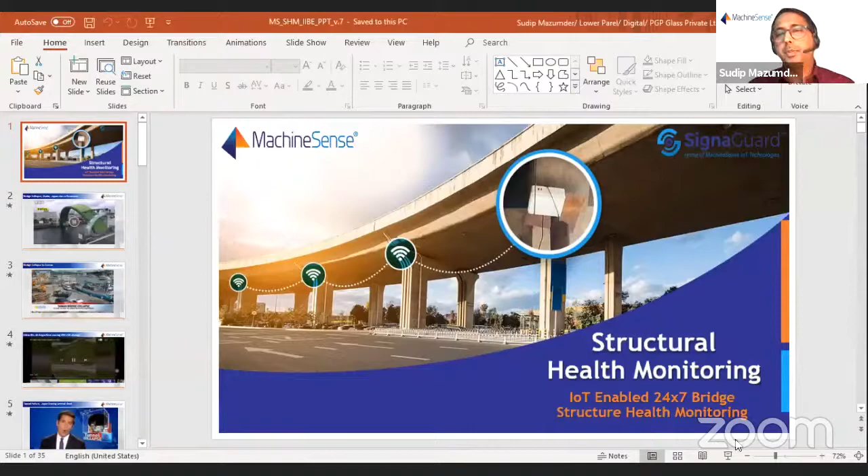Yeah, I'm there, sorry. Sorry about that glitch.

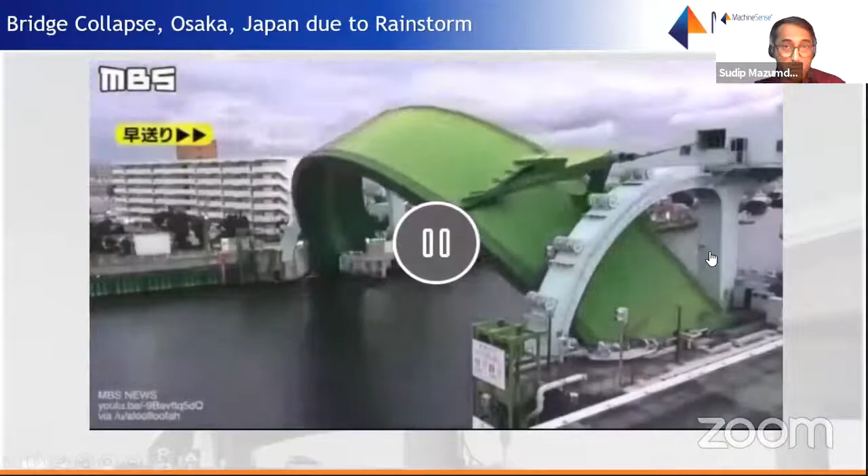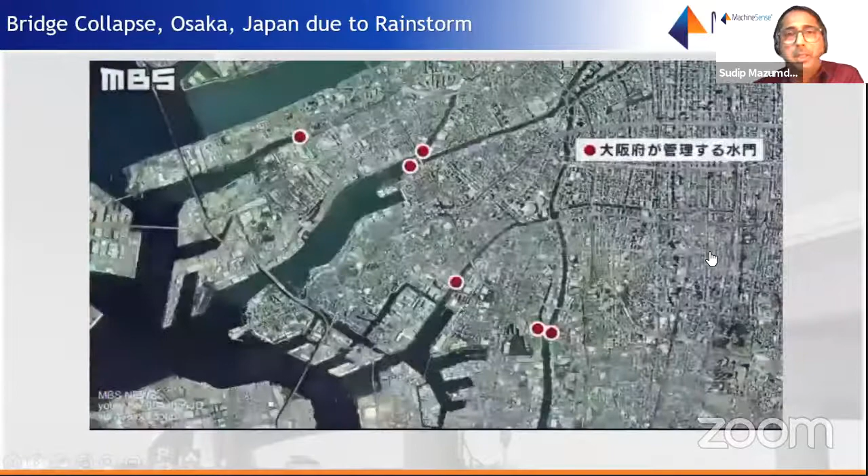Before I go into this presentation, I'd like to show some of the failures we have seen in the world, whether it's a bridge, a tunnel, or some other structure. Structural health monitoring is important, but structural failure is not something that happens only in India and not outside. This one is in Osaka, Japan - an arch bridge that failed because of a massive rainstorm. It's a question mark whether it was being monitored, but certainly it failed. Whether monitored or not, I'm not sure, but since it's Japan, we believe it possibly was being monitored. If I go to the next one, it's a Taiwan failure.

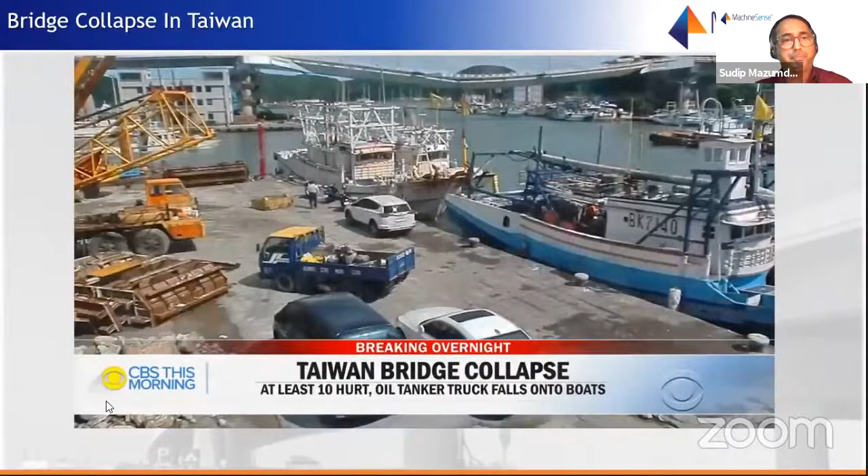A 460-foot-long arch bridge crashed down in a coastal fishing village. It caused an oil tanker truck to fall and burst into flames. Boats in the water below were crushed. Six people are believed to be trapped on one of the vessels. An Air Force helicopter, as well as more than 60 military personnel, are searching for possible victims. Ten people were taken to hospitals, six with serious injuries. The collapse happened hours after a typhoon swept by the island.

Important here is they're talking about the weather and not about the monitoring side of it. I'm sure the weather is one of the catalysts, but the bridge possibly was weakened for some other reasons as well - a 460-foot long bridge. Let me go to some other structures as well.

We believe SHM as a subject is pertinent to all kinds of structures. This is a failure in Edenville, Michigan last year, just before COVID, when $2 billion damaged the downstream. It's an earthen dam. There it goes... there it goes... this gives me goosebumps actually when I look at it. There we go, there's the rush.

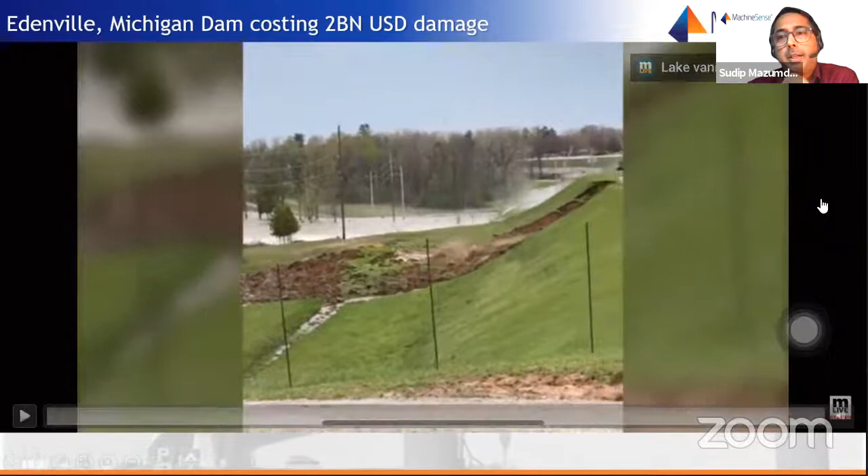And interestingly, this earthen dam failed in February 2020, and it was cleared as fit in December 2018, just 13 or 14 months ago, by the respective authorities. What this means is, I personally feel that within 12 months this doesn't happen - it must have started long ago, possibly with water seepage from the upstream to the downstream, which we could not see visually. We could have done it different ways, but we could not see it. Today, understanding the seepage inside compacted soil, from one corner to another, is so easy to do through sensors. But I believe there was nothing - it's all visual, and this is US in 2020 I'm talking about.

Let me go to the next slide. This is a tunnel failure in Japan. So I'm talking about the US, Taiwan, Japan - these are all developed countries, so obviously I don't have that much of a picture here. But this is important to set the tone for why we need this. Overseas tonight in Japan, outside Tokyo, cars and trucks were passing through a 3-mile-long traffic tunnel when the ceiling began to cave in, triggering a fire, trapping drivers inside.

Tonight, they're still searching through the wreckage, and ABC's Akiko Fujita is in Tokyo tonight. Grainy surveillance video inside the tunnel shows the frantic efforts to save those trapped.

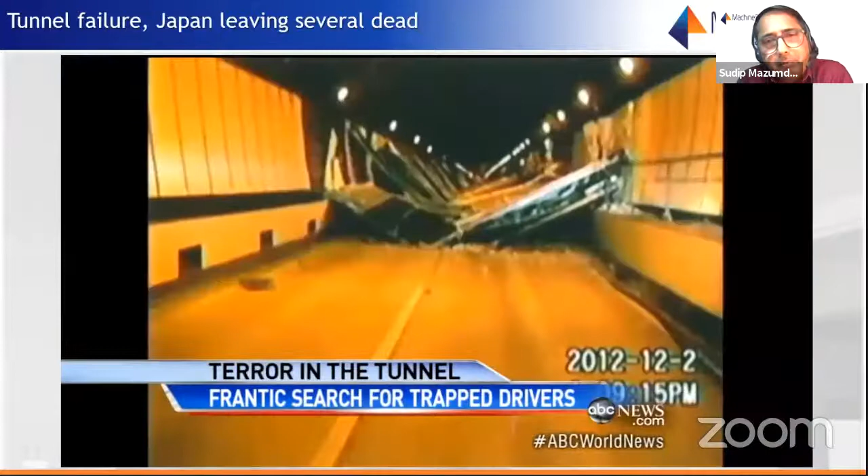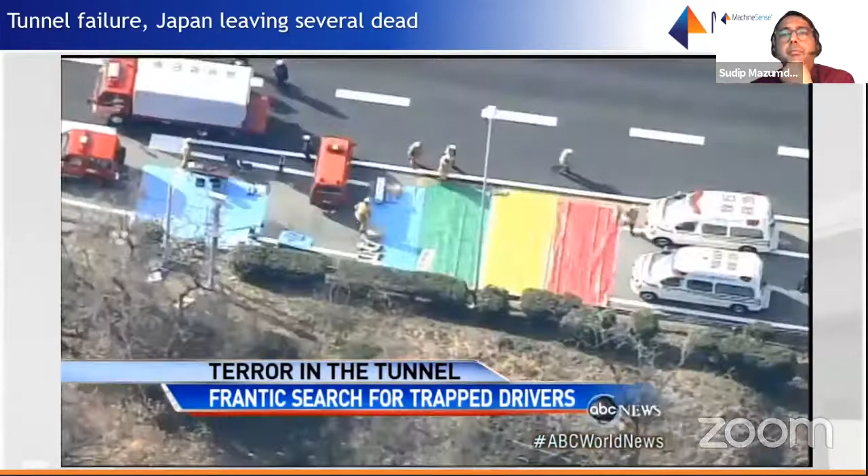Japanese police say these large concrete ceiling panels, as many as 150, came crashing down, sparking a fire on this major highway connecting Tokyo to central Japan. Witnesses describe a scene of chaos as people ran to safety. Flames and smoke billowing through the 3-mile-long tunnel.

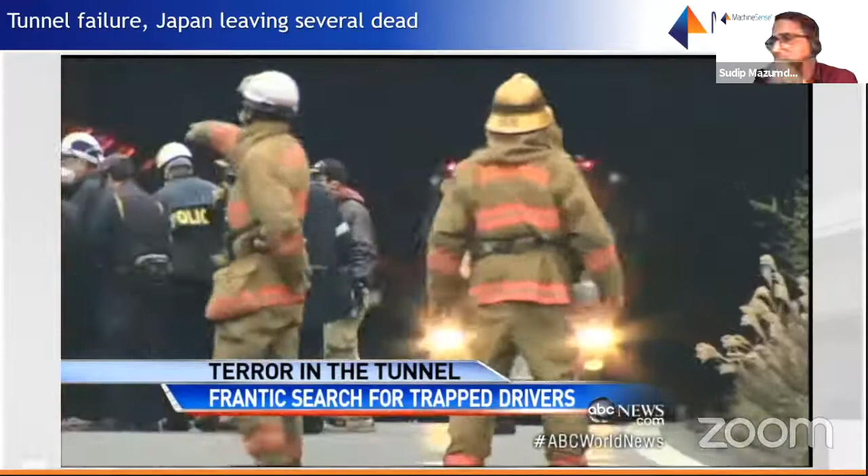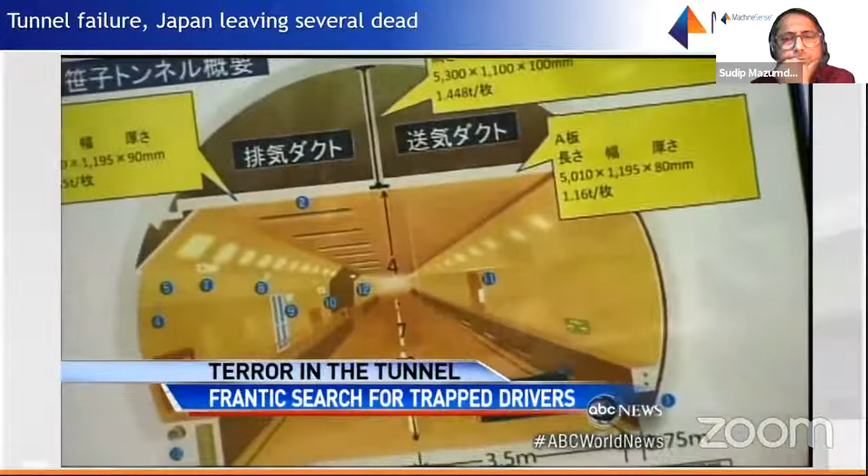One truck driver, trapped under the rubble, called for help, but there was so much smoke, firefighters had to halt rescue efforts, fearing another collapse. Late Sunday, rescue crews pulled the charred remains of several bodies, including the truck driver. Investigators are looking into what caused the panels to collapse, but say the tunnel had just passed a routine inspection in September. Akiko Fujita, ABC News, Tokyo.

Overseas tonight. So that's the tone, actually. I just wanted to set it, because it's important that we recognize today that it's a matter of public safety, that we should go for some kind of maintenance. I know that it happens, and that's exactly what we're going to talk about. But we'd like to also talk a little bit about old versus new ways of doing things, and that's where lies possibly our digital experience and your experience as brilliant civil engineering people, and how do we mash up ourselves and save for the future and give a safer world going forward.

Right. If I look at the bridge stats in India, I must say that Atul Bove told me some of the statistics. 170,000 bridges, 21,000 bridges are so-called deficient. Possibly, either way you can tag it, but it basically needs some kind of intervention. And 3,500 bridges are possibly more than deficient. Now you call it unsafe, you call it something else.

It's a separate thing. And also we looked into it, the US has probably more than 90,000 bridges. Denmark has 9,000 bridges. Sweden has 22,000 bridges. They need attention because those countries, post World War II, there are lots of bridges which actually started with 100 year lifespans, but because of weathering and because of the explosion of automotives, that has reduced the lives of those bridges, and they need to be monitored at this point in time.

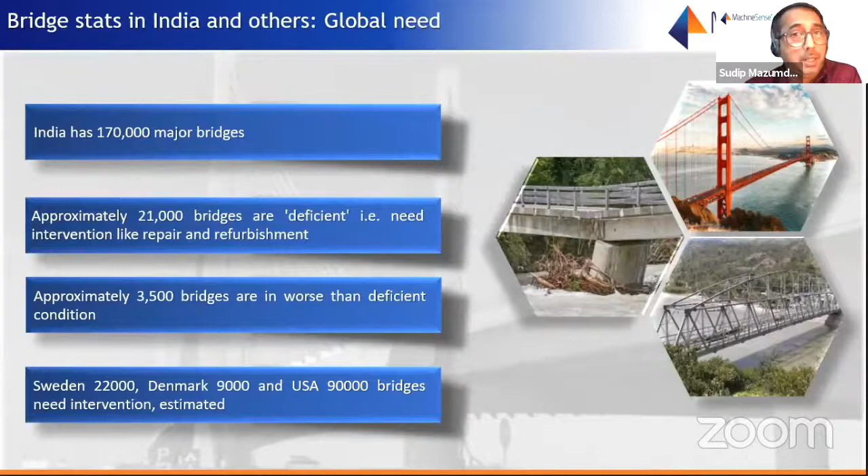And that's why SHM is a global need. At this point in time, if somebody tells me or tells you that they know it all, I think we need to look at what they know, but it's not to doubt anybody, because it's a field that is emerging. Right now, what is it that we used to do? In fact, I was talking to some of you in the audience over the last 15-20 days, and Bongirwaji is a great teacher of mine in that way, and I've got a few more in this process.

Important is, what we do is basically all physical today, right? We send, you can see the picture also. I know that one of the companies does it day in and day out. They basically have got a gantry and they send it and try to do it. But at the end of it, those two gentlemen who are doing it at the bottom of the truss, you can see, right? It's all visual.

They want to see the visual, the cracks, the rusting, the subsidence, the breakages, the corrosions, all, whether it's steel or concrete. They look at it physically. Probably they take some photographs, and later, I don't know whether they do image analytics, which is basically part of AI, artificial intelligence at this point in time. And I believe, I haven't seen it, to be honest. And if somebody does it, fantastic.

Again, important thing is that the current way of doing things is a lot of testing is done during the construction, and that becomes the baseline, and you start from there. I've seen very few cube test failures in my own life, whatever I've seen in the last 7-8 years. Most of the data that you have today, the static data, sometimes quarterly, sometimes once in 6 months, sometimes monthly, discrete data. You don't have the continuous data. Most of the places it's not in one place I'm talking about. And you put it in Excel and try to take a graph and show it as.

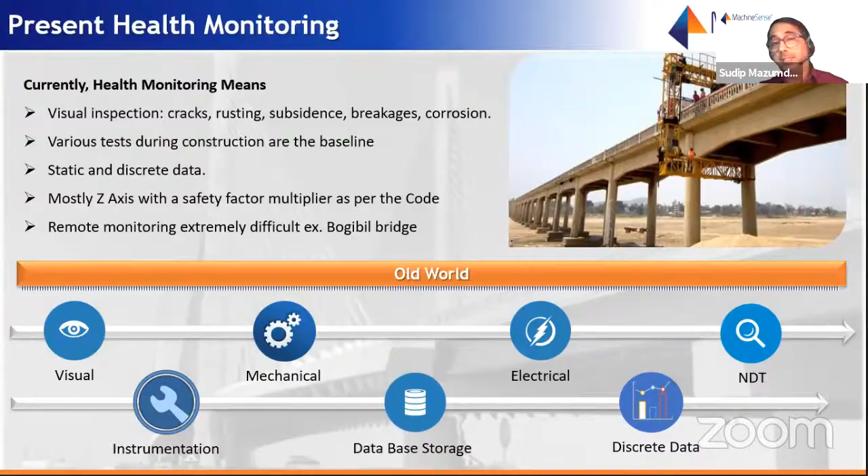So the important thing is that present health monitoring is visual, mechanical, with a little bit of electrical entity, and discrete data. Now, with the advent of new technologies, here comes Dr. Biplav, who will talk about what has happened in sensor technologies, given his worldwide experience. Biplav, can I bring you in on why this is relevant today? Your experience and research are so important for the civil engineering field, given the development in these sensor technologies.

Sudip, thank you, and thank you everyone for attending this seminar. As you know, I'm not a civil engineer, but I certainly find this area of structural engineering immensely interesting when I look at the progress that has happened in our semiconductor area. So let me give you a brief overview of what happened in the semiconductor industry in the last four decades.

Typically, every 1.8 years we have doubled the capacity to process data as well as to memorize data. We all know this because all of you have a smartphone, and you've seen that you don't like to keep your smartphone for more than 2 years, because a new model comes up with a lot more memory and speed. So we keep upgrading.

Now, what's the impact in the sensor area, especially data-driven areas? If you look at this curve, you immediately understand that right now, in the size of a coin, you can have an entire single board computer that is more capable than any desktop computer you were using back in 2005 or 2010. What this does is allow you to process a lot of sensor data. In fact, a lot of advanced algorithms—machine learning, advanced rule engines, high level regression—can run at the sensor edge. And this has an immense implication in the civil engineering area.

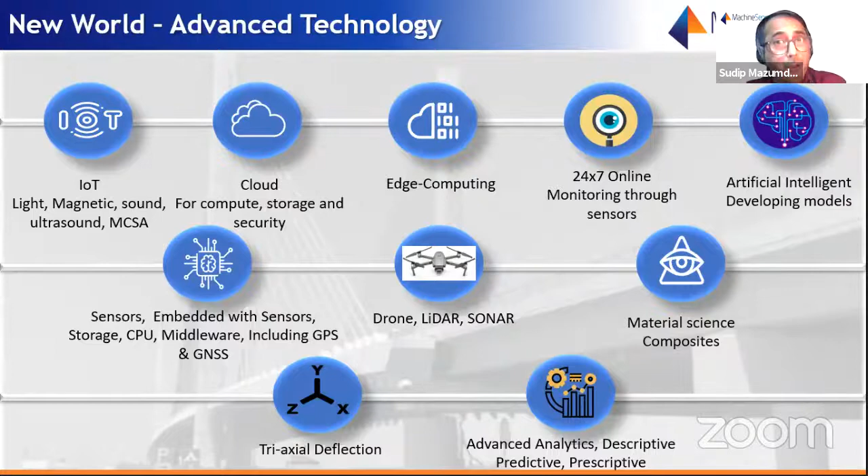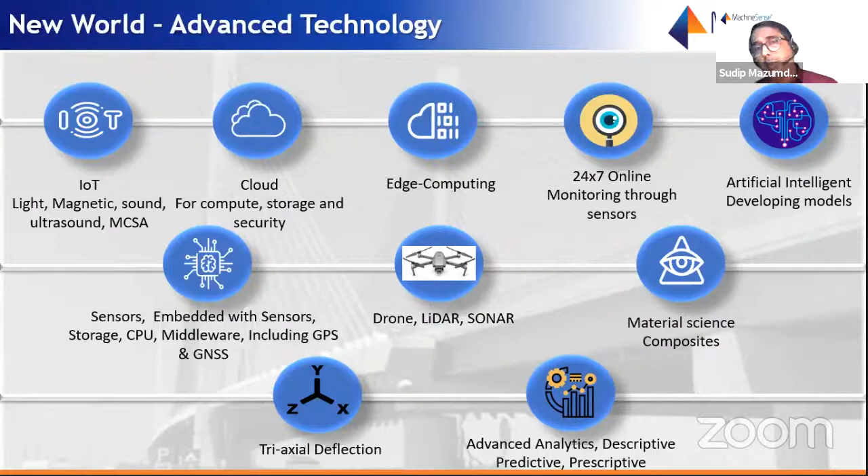So these are things, one of the specs I have seen recently, somebody is asking for a particular sensor, which is GNSS, global navigational satellite system, which actually works with the constellation, or even artificial satellites. Why do you need it? Do you really need it? And it's expensive. You need to know that there are people who have got some patents in there, and it may be quite expensive. So we can actually look at, because it's an engineering solution that we are doing, as much as the design you do, this is also a solution that we have to do, right? So there are some specs which are actually, in our view, even older. Even 2-year specs are also quite outdated. We can work together with you on what is good and what are not so good, or what is possibly outdated at this point, even if you got it 2 years ago.

Now, very quickly on this, why do you need to have structural health monitoring? In fact, we were just asking ourselves, for the last 2.5 years, when we came to the market, we were thinking, can we look at 24/7? That's a very important thing I talked about. And can we monitor all three axes, as people have talked about? Does the structure need major maintenance soon? How do you understand that from the data itself? Sensor is just one part of it.

So you can put a sensor, it's an ornament to us. The sensor will help you get the data. But then what? How will you understand? How do you assess? Does it really require monitoring or maintenance at one or two sections?

Similarly, if you look at daily and seasonal deflection and recovery time, have you ever measured it? Whether it's at night when there are loads of trucks going on, how the deflections behave with soil-laden trucks, the soil and aggregate-laden trucks that go over the bridge, how it happens, how it behaves, right?

Similarly, we'll have to look at the temperature variances as well. We know that in some places the temperature goes between 4 to 40 degrees, and how does the variation happen? In fact, we'd like to talk about it a little bit with the data.

Similarly, we are talking about, can we predict in future the residual life of a bridge or a structure, based on the continuous data, based on data for a substantially long period?

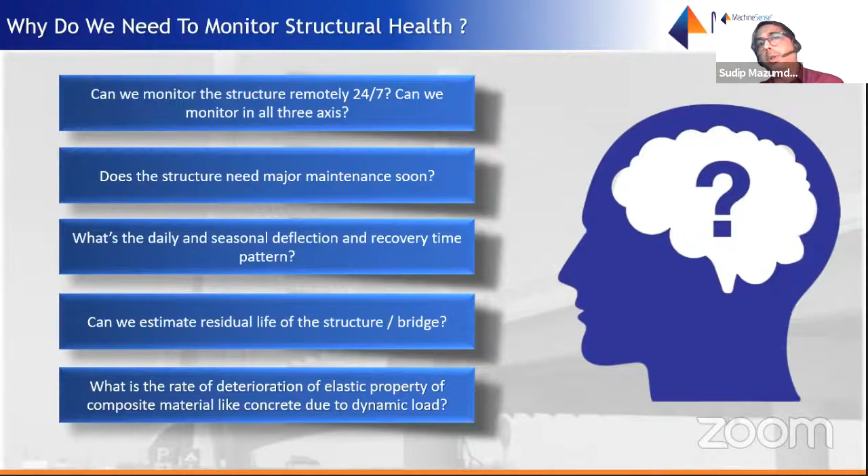So only then can we know what is the rate of deterioration. Now, deterioration is an elastic property - how the bridge is going into the plastic property zone. Steel and concrete could be different. It's more that we have asked this question on the concrete side.

Now we are asking these questions, but we believe that MachineSense as a company is actually in a position to think innovatively. Why? Because the company is a 2014-born company, only 5-6 years old.

And as Biplav himself is one of the co-founders of this company, we've got John, who is also another PhD, he's working on this. And the guy who founded this company is basically Conrad Bessemer, who I told you about last time also. He's the great-grandson of Henry Bessemer, who is the inventor of steel, right? So it's in the gene.

And we believe that we are the company that can actually challenge this part of the world, not only because of the heritage, but because of the gray matter that we have, and we are hiring.

Now let's go to the end-to-end solution part. What do we do actually? If you look at it, there are three basic blocks at the top. One is the basic building block to us. Second one is design and build the software, what actually processes. And the third one does the analysis, the actual causal analysis - what is the effect, what is the cause, and why it is happening. All the whys are to be based on the data on the right-hand side.

So the basic building block is basically sensors, different kinds of sensors. Of course, there's lots of patents, lots of big physics work happening at that end. Though it's very small, we've written that it's just getting sensor data, but sensors could be of various types, various technologies. After that, once you get that, we actually process it through the gateways - even the gateways could be extremely sophisticated.

And then once we get the data through the gateway, we put it in the cloud. And why do we put it in the cloud? Because we've got the storage space today, we've got massive computing power. People have talked about the algorithms, and interestingly those algorithms today can actually run on the chip as well - even on the sensors, because we get the space. Even a thumbnail-size computer can process terabytes of data today. So thanks to the technology.

And once you do that, there's some basic analysis you can do on the cloud or on the local server where the data is being kept. So what kind of analysis can you do - normally if you look at anyone, they'll be showing you some kind of time series data. We also show the time series data. Time series data is nothing but what's happening over a period of time.

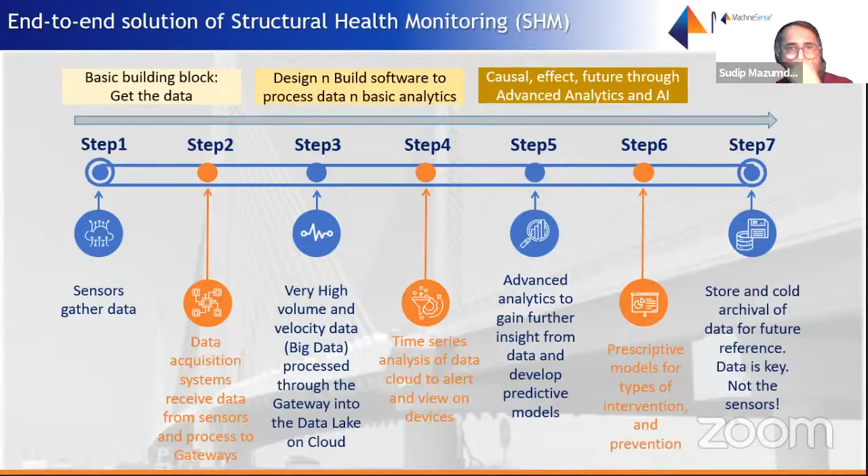But important is, whether it's the cable level sensor, the girder level sensor, or the bearing level sensor, we're also talking about the scouring sensor. I've been given a challenge to look into whether we can get some sensor to measure the scouring post-flood situation. Definitely will be looking into that if something exists in some part of the world. We don't have it, but we have the necessary wherewithal to approach many others.

Another important thing is, if laden trucks or trailers are going, the validation engine works basically through CCTV cams, etc. What you used to do earlier with manual and visual checks can be done today through drones. All this data can go into our cloud, and from the cloud we can do the analysis and show it on the mobile as well as on your computer.

It's as easy as that, but again there are two parts of it, as I said. One is the time series analysis, which also has a lot of sophistication, but an even more sophisticated way is, how do we get the causal analysis?

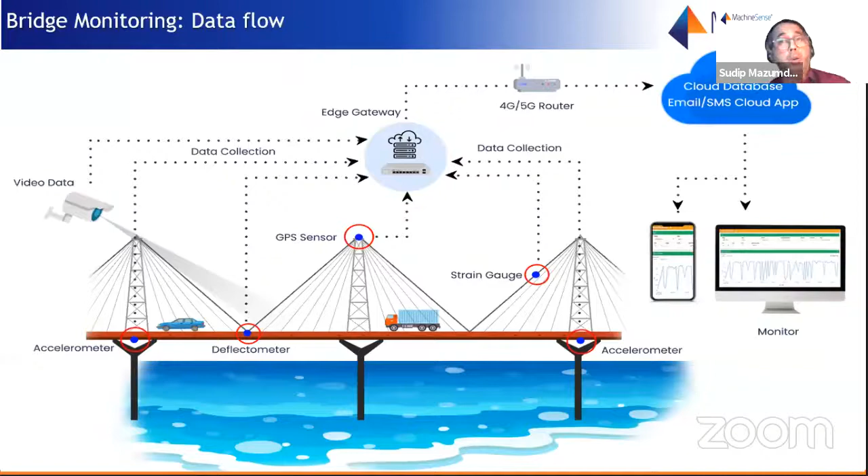So if you look at what you monitor in the bridge system: deflection, acceleration, strain, temperature, load, inclination, scouring - these are samples only. Lots of other things can be done, and different structures have different types of data to be gathered. It doesn't mean one size fits all, because for every type of data we have to look at what kind of sensors we need, how modern they are, how expensive they are, and we also have to look at cost effectiveness.

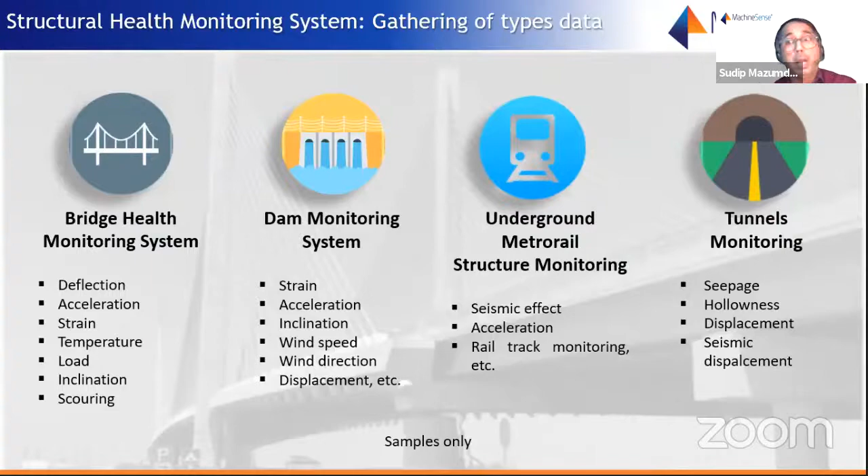We also have tunnels or bridges in the Himalayan region where we need to monitor seismic vibrations and gather that data. Not only gather the data, but also effectively nullify the vibration through mathematical algorithms - to determine which part of the vibration is due to earth movement, and which part is due to vibrational deflection from the loading pattern of vehicles, or other elements like winds.

Now if I look at a holistic system, that's what we are talking about. A holistic system basically involves different types of data - whether it's accelerometer data, vibration and deflection data, or drone pictures, CCTVs, or any other normal pictures as well.

Similarly, maintenance records - we believe that past maintenance records also have a bearing on structural health monitoring, because if you've been doing minor or major maintenance over the last 5 years on a bridge, that definitely has a bearing on the health. That's why we believe that record also needs to be part of the analysis.

And various kinds of analysis - I'm not going into too much detail of that today. The geotech data, in fact, should also be part of it at some point. I'd love to look at that side too, from the subsidence point of view of the bridge.

Similarly, testing labs - if we get the test data during construction of these structures, and secure that test data, it can be very useful after some time, because we don't have it currently. Having been part of some large construction companies, what typically happens during construction is: fill it, shut it, forget it. How do we get that filled data not to be shut away and forgotten, but made available for the future? That's what we need to do.

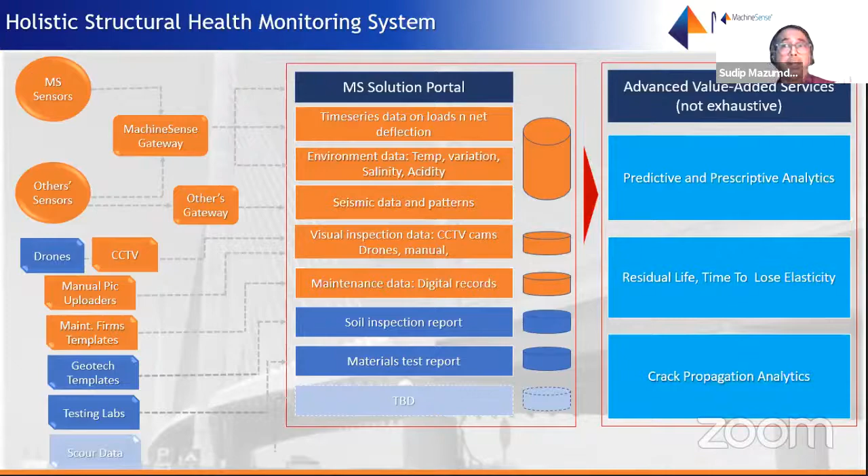But important is, let's make a start. If you have done it, we can actually look at that, and it will be enriching the field itself. And that's why we believe we can contribute to this world.

Biplav, can you just take this slide, please?

Yes, thank you, Sudip. Let me give you an overview of the initial sets of sensing mechanisms of the sensors we have in MachineSense. I already briefed you about the 3-axis deflectometer. This is a wonderful innovation of edge sensor technology, because we run a lot of computation on the sensor edge. Using that, we will be able to detect a deflection as small as 10 micron resolution.

Then we have ambient temperature, air temperature, and humidity sensors, out of which surface temperature is important because it gives you the surface temperature of the steel structure, which is very important because you'd like to know the temperature of the surface of the object.

LVDT, as you always know, is a good sensor to measure whether there is any gap or any kind of fracture that is coming up. You can monitor all kinds of fracture.

Then 3-axis deflection, 3-axis tilt and strain sensor is a traditional tilt and strain sensor where you will be able to figure out the 3-axis tilt. The only innovation we've done compared to others is we might use the same transducer, but we also do a lot of edge processing, meaning we can correlate the root cause of that tilt by connecting it with a vibration sensor or a load sensor. So that comes to the next one, the 3-axis accelerometer and vibration sensor.

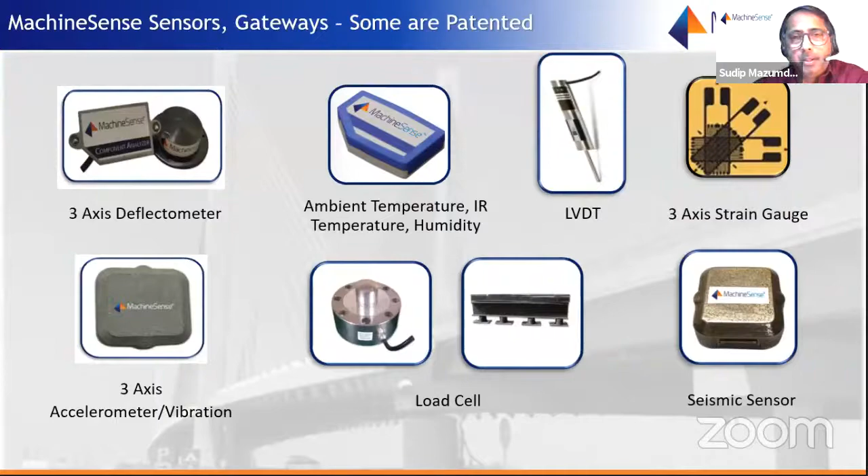This is one of the things I know Biplav loves, though he's not a civil engineer, but we talked about it, is the XYZ, the triaxial, why the triaxial stress. Yeah, this is a good one. I just want to take one more minute to tell you exactly.

One of the biggest challenges, not only in the code but to most structural engineers - I'm not a structural engineer, but I'm collaborating with many at this point - is that at any point in time you have curvature in any of the bridges, and that shear force will go tangentially and somewhat outward because of the centrifugal force from a moving truck. That is very difficult to monitor without having a 3-axis measurement, either in the strain or deflection. Prior to our innovation, there was nothing that could have measured 3-axis deflection. Now we are measuring this in our Ultadanga bridge, and we can measure the 3-axis deflection pretty regularly.

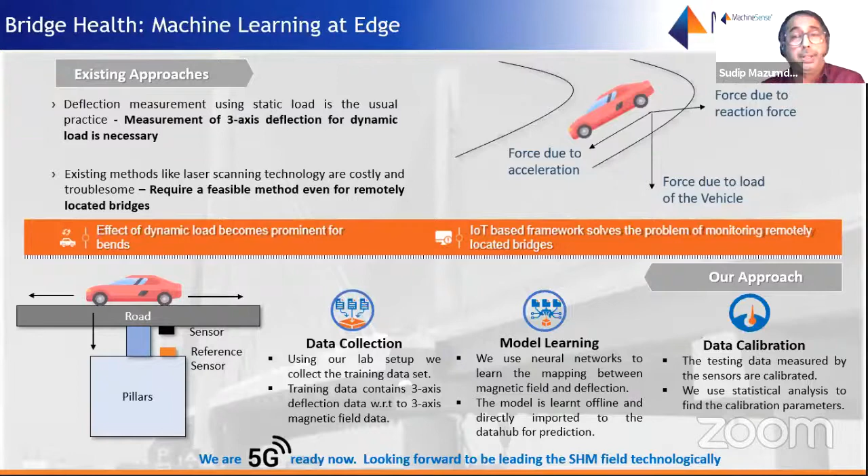I would just clarify one point - I know some technology companies also claim to do 3-axis deflection, but they use laser technology, and the Z-axis deflection they measure, and the X and Y they measure, are actually less reliable than the Z-axis, and that's the technology they use. I'm not saying some technology is bad or good - technologies are changing. Even our technology, probably after 3 years, we'll have to innovate on top of it. I'm just saying this for the sake of the audience.

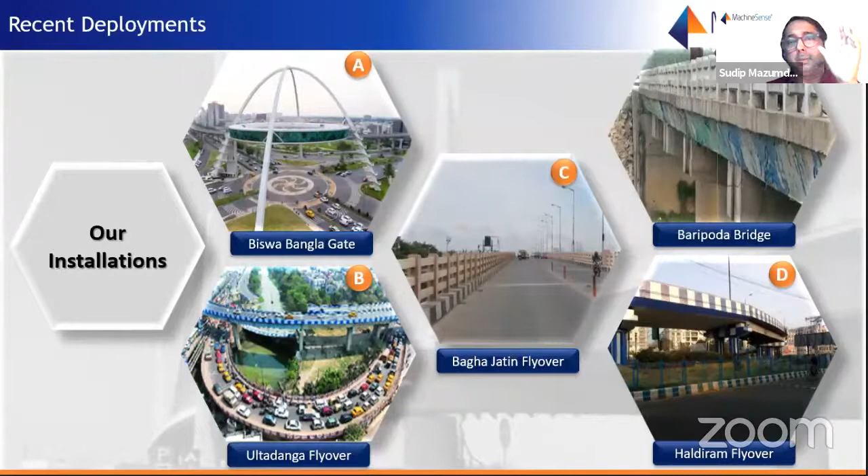Now next, we have some deployment info. Just to let you know, MachineSense, being a US company, has offices in Baltimore as well as Kansas City, and in Kolkata we have around 50 to 60 people, including some brilliant PhDs working with us - some of that work I'll show you. And the data gathered from various bridges, what we're trying to do is not just about putting the sensors - that's one of the jobs we do, and we do have partners as well - but what's important is once you get the data, what do you do with it?

What we do as mathematicians, digital practitioners, is when we look at this kind of large dip, meaning large deflections, we try to correlate it with what kind of vehicle it is, what kind of loading it possibly has. We get a picture, but to validate that, this CCTV camera is working for us.

And what people have just talked about, tomorrow is not so far. We are in the process of looking at deflection and trying to predict what vehicle it is, or what the load of that vehicle is. We can even go to that extent - whether it's multi-axial or single axial. We haven't gone there yet, but we are very close to doing that.

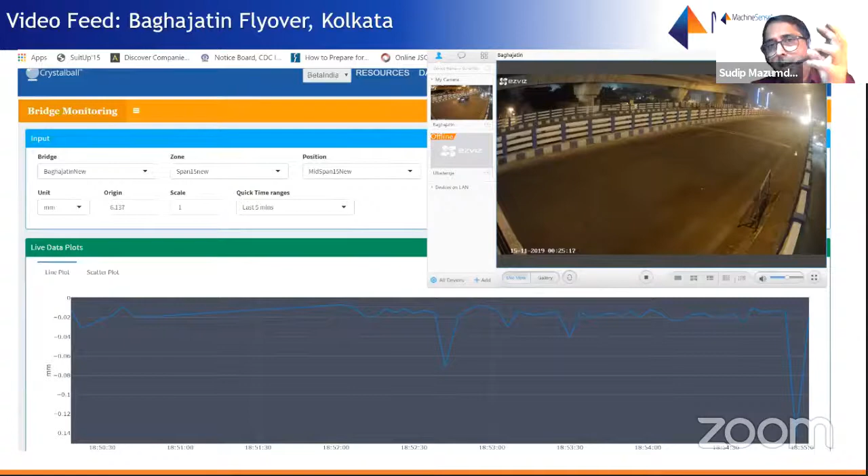So that talks about a possible insight into a material like concrete, which is a composite - it's a composite material. It looks homogeneous, but it's actually heterogeneous. So how does it behave? Today, that kind of behavior you cannot assess in any way other than visual. So we are saying let's take a data-driven approach and understand how the behaviors are.

So basically, I wanted to tell you this is from an original bridge. I've taken this a little earlier view because to show the data, we need some kind of permission. We took permission some time ago, so we are showing it. But it's important again to show this.

This is also a laden truck, you can see that. This typically happens in the night. And this bridge actually got weakened because of the movement of such heavily laden trucks at night. And we actually recommended not to allow them through a portal.

Secondly, when this goes down, as I told you in the last meeting as well, if you look at this bridge, it's actually in a little better condition. And this is the Z axis only - we do have X, Y, Z, all three axes. Now, this movement has come back almost immediately.

And it's a new bridge. Actually, there's an old one - you can see the other bridge in the other direction. If this happens, the truck happens and it will be coming here. So the recovery is worse in that bridge compared to this one.

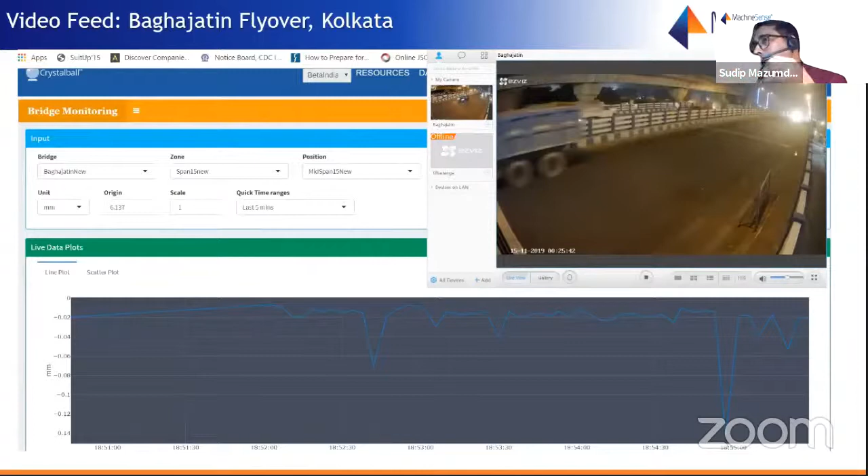This is where actually we'd like to go to. I'm just going to speed up a bit in the interest of time.

So what do we do in the MachineSense type? We have the sensors and a scalable software platform which can take terabytes of data from multiple bridges across the globe. We provide insights for data-driven decision making. Next, I'll show you some of the interesting curves we do, and we'd love to do this for you if you call us.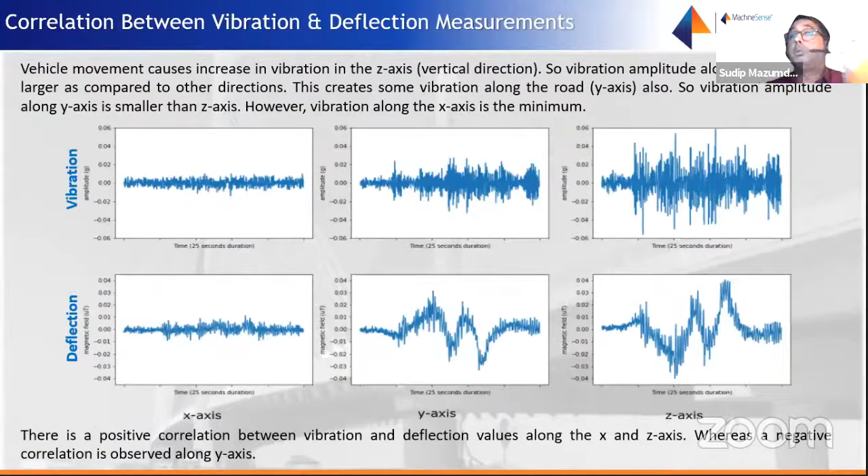So that's one part of it. Second, what do we do with it? We look at the data and do noise reduction. You may see lots of noise, meaning lots of deflection, but some of that deflection is caused by other elements - it could be seismic, or because of weather temperature. It has an effect on the sensor because sensors have a lot of metallic parts, and that creates noise too. So what we do is cancel the noise using algorithms, from raw data to processed data, and finally we get the result.

So if you look at the last one, this is the actual deflections data we got over a certain amount of time. This shows another important thing - not only the amount of deflection, but also the frequency of those high deflections, which actually weakens the property of the material. That's what we're talking about.

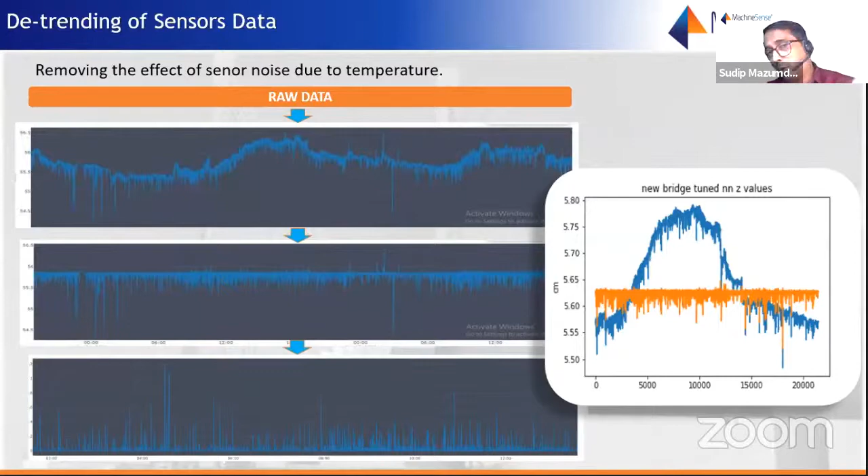Now, this is also done for seismic data. Unfortunately, in Calcutta, there is no seismic sensor at this point in time, as far as I know.

Next is weather temperature. We know that when the temperature increases, the deflection is affected. How do you measure it? Possibly with NDT, putting some gunny bags, etc. We give you 24/7 monitoring. This is what exactly happens - if you look at February and March, you see how the deflection happens. The X-axis is the deflection, with two curves: one for colder time, one for hotter time. See the deflection in the hotter time with a similar type of load - we've analyzed similar load density - and look, it creates 7 times more deflection. So it will be easier to understand and predict failures because of the weather effect. This is what we've done for temperature.

We're also looking at wind - you saw that Taiwanese bridge collapsed because of wind, they say. So we need to understand which other sections are getting weakened, how it's weakened, and why. It's not just about what you've seen in the Kolkata bridge that we showed - it's about why it's happening and how it's happening.

Again, then we looked into the curve. If you look at this interesting one, for the same stress, we tried to analyze the same data, and the same stress is causing much more strain on the bridge.

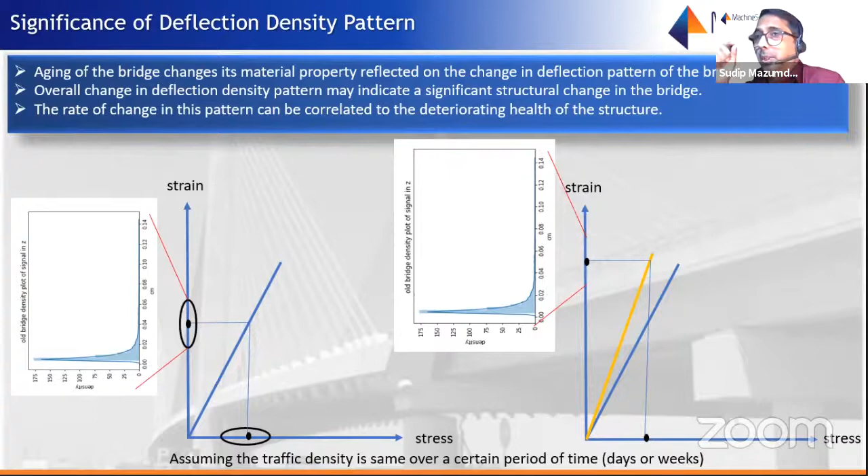And this strain under the same load condition, if we try to project how it looks, we'll show it to you. So we looked into the data, put it in a scatter diagram, and tried to see how these variations appear at different points in time. Clearly, on the right hand side, when we put in the normalized data, we can see there's a pattern in the bridge we are monitoring in Calcutta.

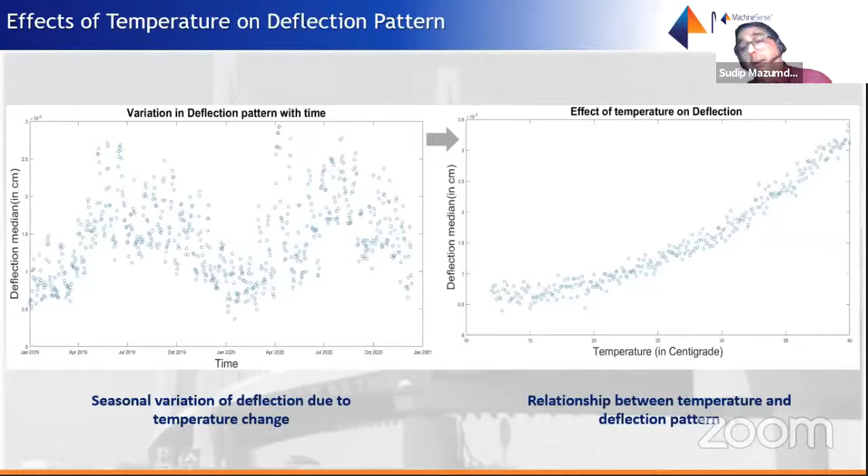This curve may be different for different bridges, and that's why we say it's a signature of a structure, different for each bridge. Even though both use M40 or M25 concrete, it will differ because the weather conditions are different, the load patterns are different, the absolute load is different, and the dynamics of the loads are different. As I said, a 20-ton truck at 60 km speed versus a 20-ton truck at 40 km speed will have very different nature of y-axis and z-axis deflection.

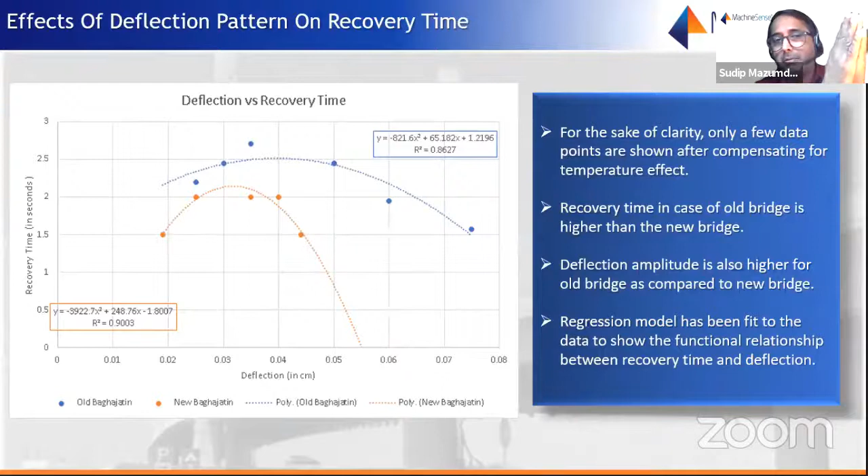So I'm just trying to show you a comparison over a period of time. The blue line shows how the deflection happens when it gets weakened, and the orange line shows that under the same load, it shows much lesser deflection. But we believe our analysis in the next curve will show how it is progressing. This is what we are trying to do at this point in time with the data.

That means we will be able to tell you what is the timeline for this - is it 5 years, 10 years, 20 years - depending on what data we are gathering. So I would really request you all to look at data gathering as important, but also to get insights into what's actually happening within the structure.

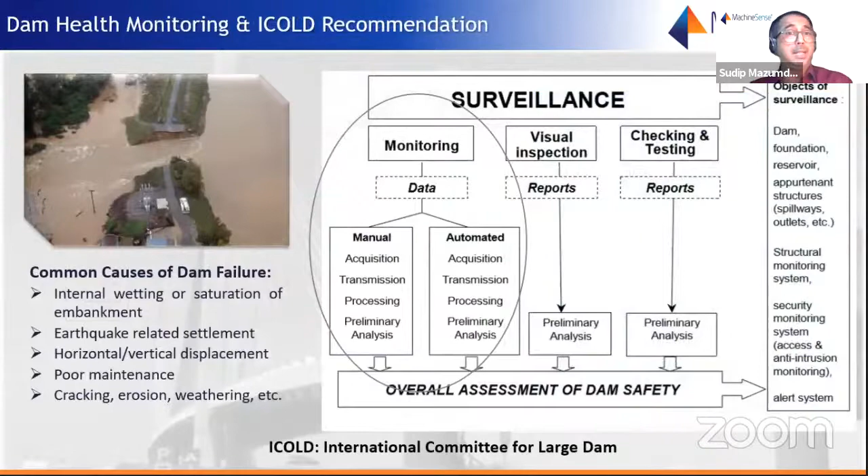So this is for the bridge we got, and we are trying to work with other companies as well - I'll come back to that. Similarly, it can be done on a dam. The DRIP program is there in India and globally. It can be done, and probably a dam will have much more than this because it is upstream - we'll have to look at the scour, the silting, and other things. Those things will also come in, along with displacement, similarly for the tunnel.

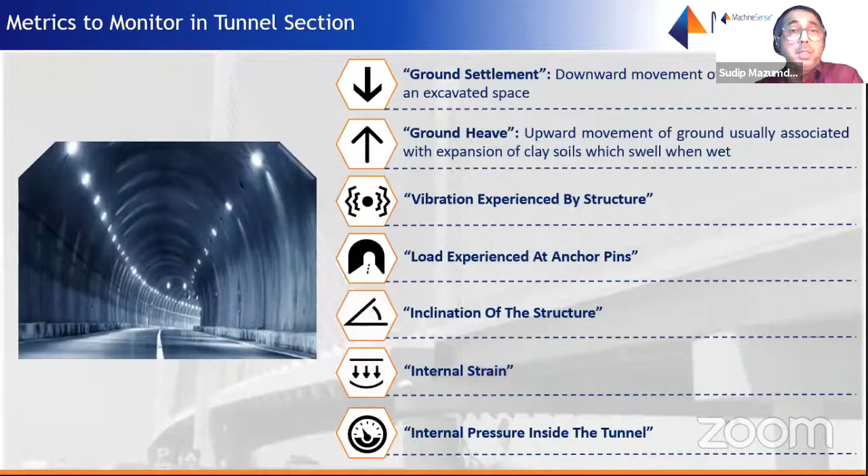In fact, interestingly, I have taken up the co-chair for underground construction, digitalization of tunnels and underground construction - this will be my subject very soon. Very specific subject - what do we do for a tunnel? Various things we can do, and we need to do it because we have very strategic tunnels like Zojila tunnel that need to be monitored. Otherwise you saw the Japanese failure - I wanted to correlate between the two, why we need that.

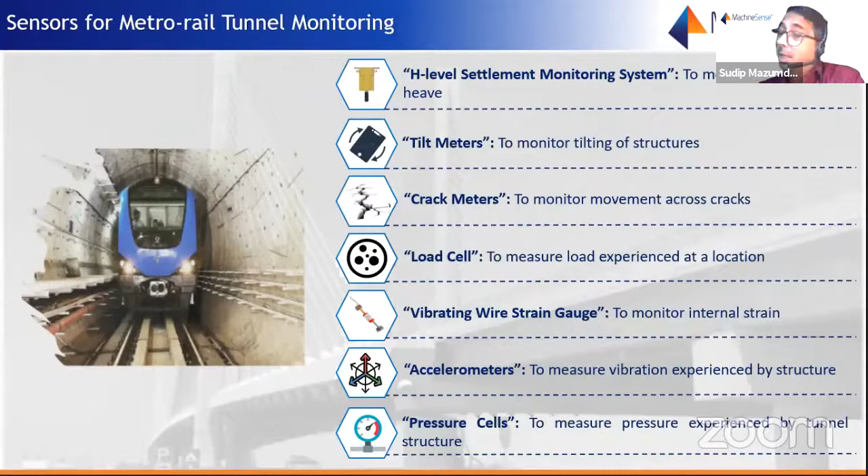And we have so many tunnel boring machines going left to right and north to south in Mumbai and other cities. We really need to monitor those vibrations because there are lots of buildings up there, and we need a precision mechanism, not the way we used to do it 10 or 5 years ago. We can leverage a lot of new technologies and experiment with them. I think Biplav will be talking about this.

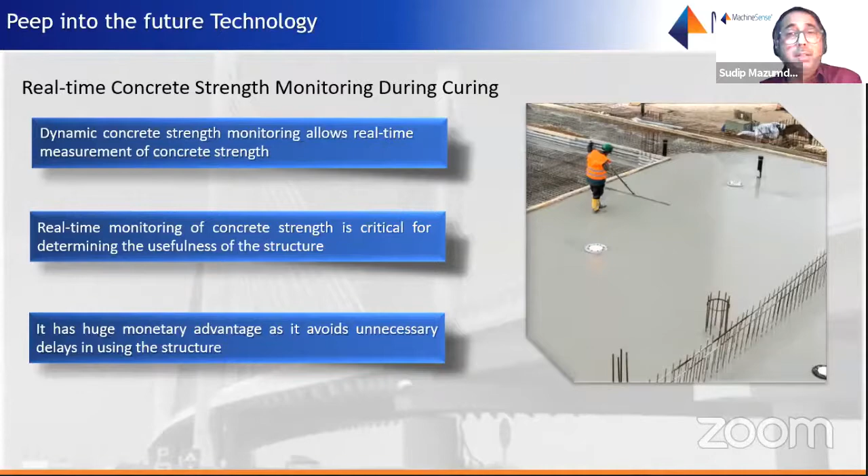We have taken the technology to the next orbit, and we're ready to experiment in civil engineering, not only based on sensors, but as you saw, we're talking about a data-driven industry, whether manufacturing or any other field. I personally believe, as a civil engineer who has worked in multiple other industries, that civil engineering can also adopt a data-driven future very well and quickly.

Another important thing is that we're a technology company at the end of it. We're not very large, but we'd like to be large on the technology side. We do have global tie-up mechanisms. We're working very closely with some companies, very specifically like Testia, an Airbus company. They've got very nice sensors spun off from the aviation industry, and we're trying to bring some of them to India.

Similarly, QuakeLogic, a very seismic-oriented company, we work with them in the US market for certain Californian region bridges as well as buildings, which are very seismic heavy. Similarly, we've recently tied up with TPF, Atul Bhobe's company, and with that we're looking to work with Akselos on digital twin steel structures. That's a partnership—this is just a few of them, and we have multiple. I just thought it'd be easy to talk about them.

Similarly, with universities, as people said, we're talking about Purdue, Kharagpur, Maryland, as well as Pittsburgh. Lots of other universities are also on the cards, because we're scouting for technologies for the civil engineering field, and we'd like to take it to the next level.